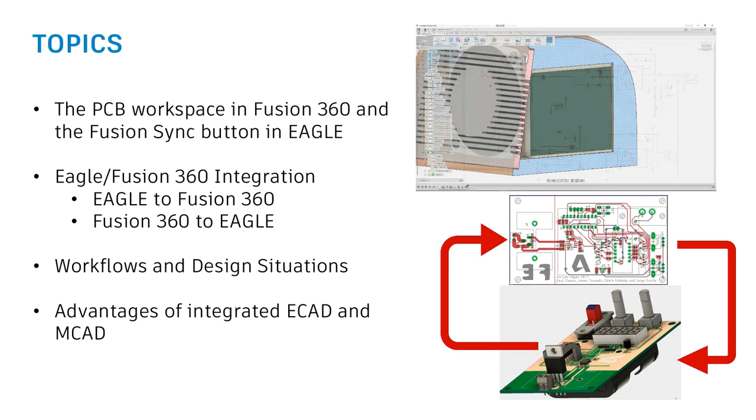So the integrated tools in Fusion and Eagle seek to resolve this by allowing a PCB component in Fusion to be linked to an Eagle board file. What this allows teams to do is work in a single Fusion design and a single Eagle board file, which eliminates a lot of the file management problems we used to see.

Yeah, usually there were a lot of errors when it came to conversion, so this eliminates that. So we're going to kind of walk through a bunch of different things with this in this presentation. We're going to start off slow.

The PCB workspace in Fusion and the Fusion sync button are the tools that we use with this integration. We're then going to jump in and show the two main workflows. We can either go Eagle to Fusion or Fusion to Eagle. We're going to discuss when we should use those workflows based on our design intent and the situation we're in. And we're going to wrap up with some of the advantages of this integration and some of the things we like about it.

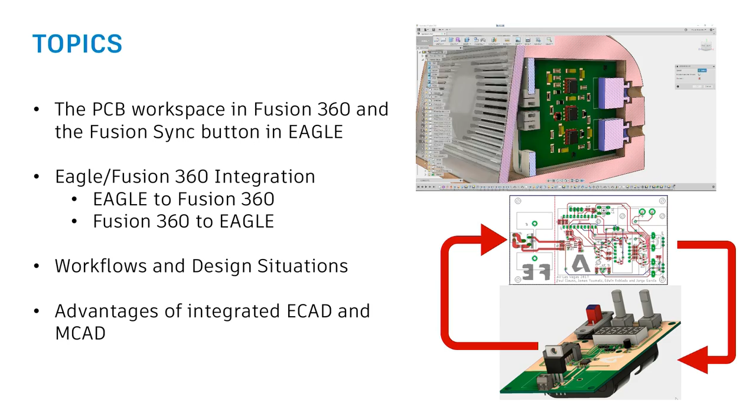So the PCB workspace in Fusion is how we can create PCBs in a Fusion design. Right now, the PCB workspace is relatively simple. We have only 4 tools.

We can access these tools in this workspace by using the Create PCB option. It's important to note that you're only going to see that option when you're working with the design history, or in parametric mode in Fusion. You won't see it in direct modeling. Using these tools, our mechanical designers can create a Fusion board shape and a board component with the PCB profile tool. We can copy the profile of a board brought in from Eagle with the Copy Eagle Profile tool.

We can edit the layout of 3D components, the packages from our Eagle libraries that are applied to the board, with the Move PCB components. And we can use the PCB status tool to see if any changes have been made to the board in Fusion since the last push to Eagle.

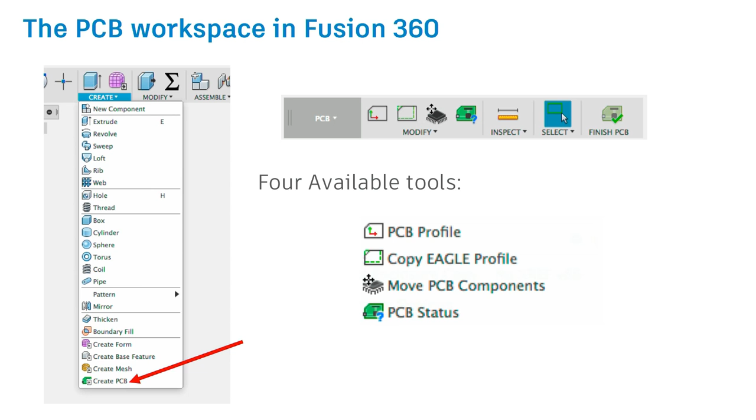We'll be demoing these tools throughout the presentation. The first thing you might notice is we don't actually see anything to communicate with Eagle. That's because all communications are done through the Fusion Sync button on the Eagle side. On the Fusion side, you define the body, and then from Eagle you can see that body and pull it in. So all the magic is kind of being triggered by Eagle, which is pushing to Fusion or pulling from Fusion. We'll make this clear in a minute.

If you don't mind, I'll go. Oh, go for it, I hate standing on one spot, it's too boring.

We've added a button into Eagle. If you have Eagle version 8 or larger, there's a new button that says Fusion Sync. That's where all the magic will begin. We can use the Fusion Sync button to link Eagle to a board, to a Fusion design, either a new file or an existing PCB.

When I click on the Fusion button, since you're using the same account in Eagle that you have in Fusion, it will let you browse all the projects that you have in Fusion. That way you could push that circuit board over to Fusion 360. This keeps both teams in sync, so it could be my own account, or if you're already collaborating with another team, you could push to their account, to that collaborative project. We'll be demoing this in a few minutes.

Now let's talk a little bit about the pull and push terminology. The Fusion Sync button helps us know when the board needs to be pushed or pulled. It gives us a status of where we stand in our design, collaborating with Fusion, and this is done using a color code.

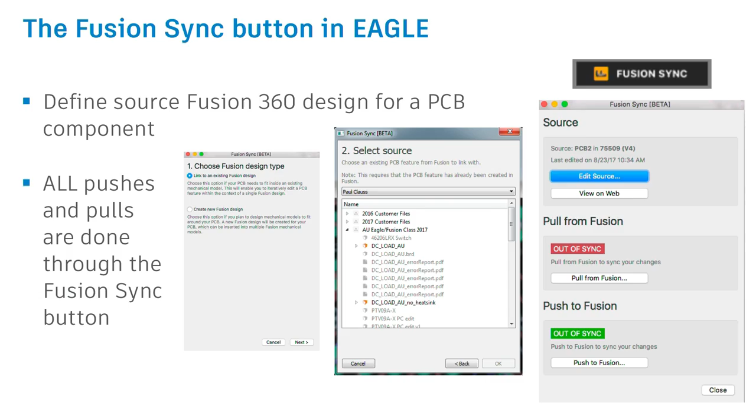Because we can either push from Eagle to Fusion or pull from Fusion to Eagle, we've got two ways to get a PCB into a Fusion design. The first is taking an Eagle board and pushing it into a brand new Fusion file. This will create a file that contains only the PCB board component and the applied 3D packages that we've mapped out in Eagle.

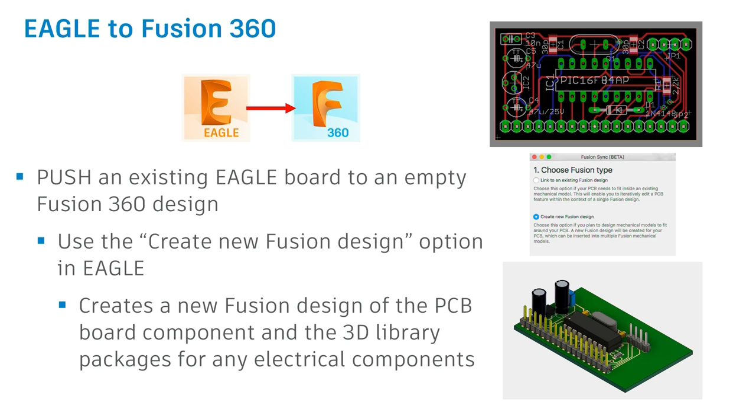We've got an example of this, so let's go right to it. This is Eagle right now that we're working on. Some of you are familiar with this workspace. Basically, I'm clicking on the Fusion Sync.

In this example, we're pushing a brand new design into Fusion. It lets me browse your account, since you're using the same account between Fusion and Eagle. It lets you browse the different projects you have, and once you find the project you wish, remember this is a brand new project.

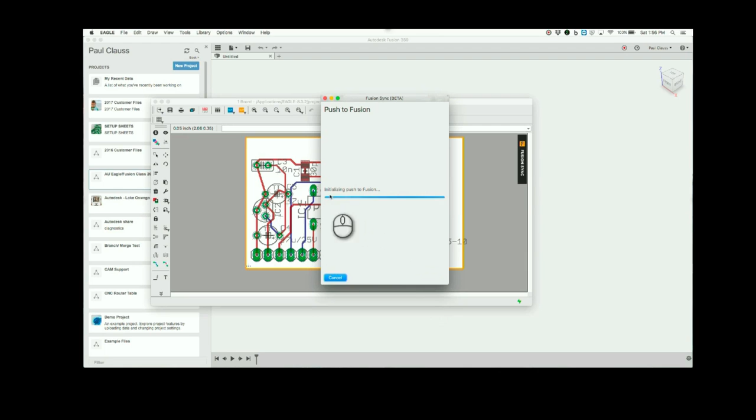It lets you know that your 3D models have been mapped out, that's what the green check mark is. I can make comments to my brand new push, and then I could go ahead and do the push. Now that will take a few minutes, so that's why we're using videos, because it may take a minute or two. This is all cloud-based, and it's using managed libraries.

Once we push it, you'll get that toggle right there letting you know that it has been successfully pushed. Now the mechanical engineer, or yourself, will actually see the render in 3D.

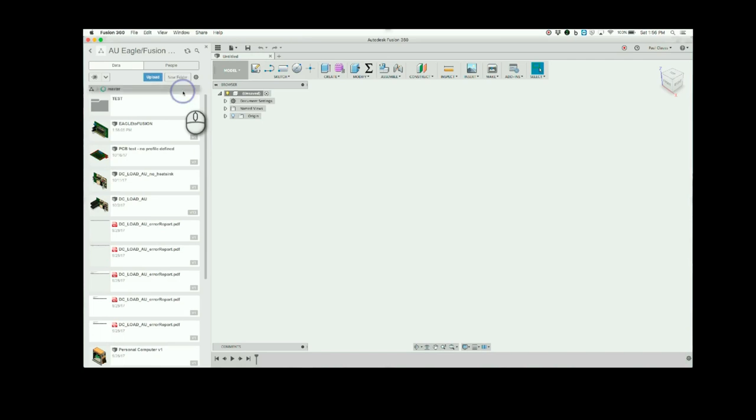So then I can go into my hub, find the location that we pushed that board to. I can see version 1, the comments that Edwin just left are shown in version 1 there, initial push to Fusion. And then I can open up the design.

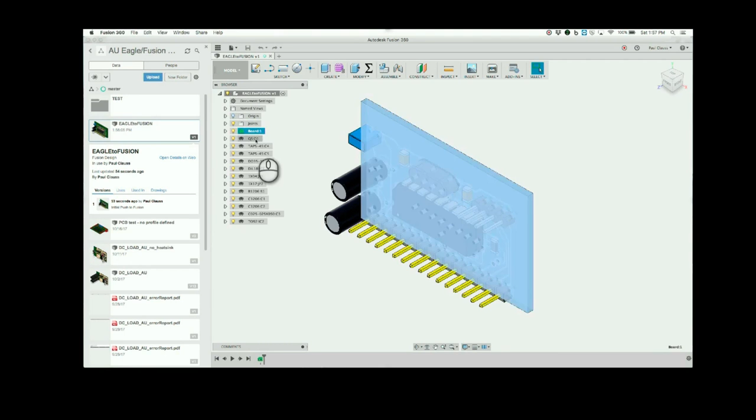We'll open up the design and we can see we have our board component and then all our circuit components are at the top level of the browser. This is something to be aware of because there are some organizational things like that. Sometimes we're going to want to create a subcomponent to manage our browser a little better.

But for now, let's have a look at the PCB status tool. And what this will show is that we only have an Eagle board shape. We haven't used the PCB profile tool in Fusion to create a Fusion board shape.

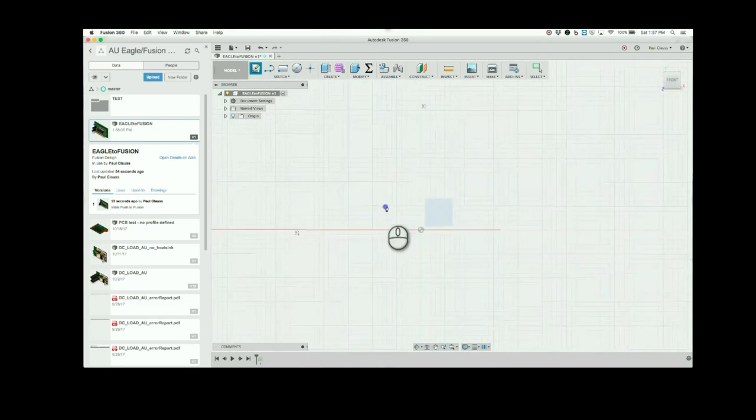Let's say, as an example, I just want to make this board slightly larger. What I'll actually do is roll back my design timeline so I can create a sketch before the PCB, create an empty sketch on the plane that the board lies on, which will default to the XY plane.

Then I'll label this sketch, I'll just call it board profiles for organization. And then what I'll actually do is go back into the PCB workspace and use the copy Eagle profile tool to copy in a sketch for reference. The reason I'm doing this is because we need to have a sketch before the PCB profile to create the Fusion board profile from.

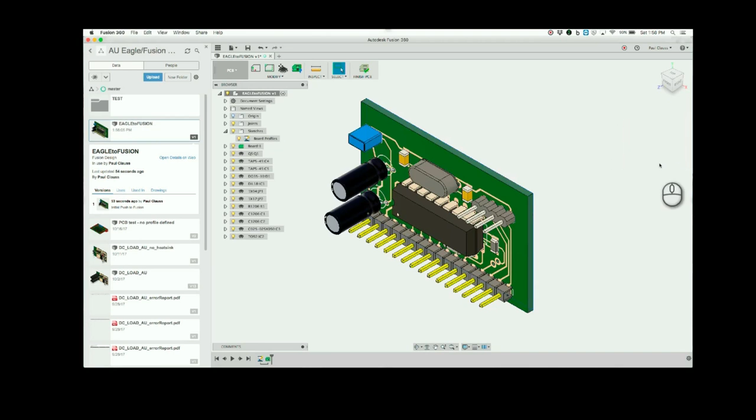That's how the design timeline works, we need to have that feature in the order beforehand. So I'll copy Eagle profile, open my sketch. Simple example here, we'll just drag out a larger rectangle using that first one for reference.

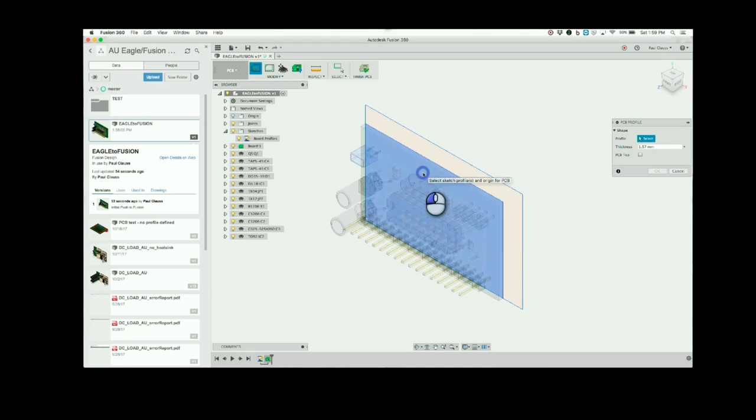Now we could actually go back into the PCB workspace and define our Fusion board shape with the PCB profile tool. So I'll just grab those two sketched loops, it'll merge them together. I'll keep my origin in the same place as the Eagle board.

This is important because Fusion actually uses two board shapes, but only one set of components that refer to the origin, so you can get them jumping around. Now we'll see in the PCB status that my Fusion board shape has changed since the last push. My Eagle board shape is always going to refer to the Eagle board used during the last push to Fusion.

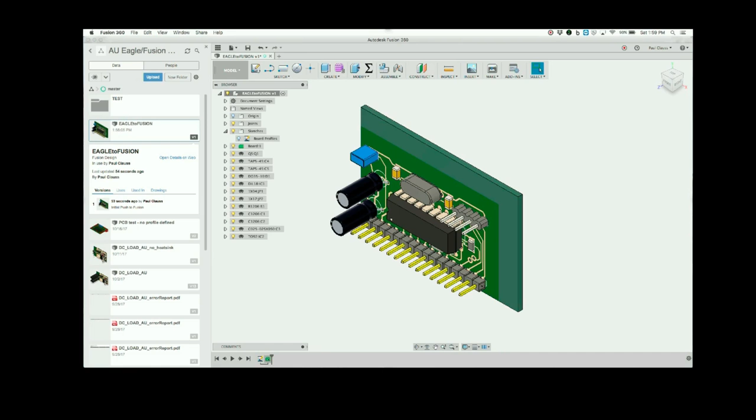We'll notice that I end this with the Fusion board shape activated, and that's because we'll want to pull those changes into Eagle during our next pull. If we had the Eagle board shape selected, there would be no changes to pull into Eagle.

So this was basically an example of a simple way of pushing from Eagle. Now we'll just go into other scenarios as well.

Our next scenario is we might want to start in Fusion, and a lot of times we want to do this to use the drafting tools in Fusion to start our board. So we can create the PCB, create the sketch, PCB profile, and that'll create the Fusion board shape, like we showed in the second half of that last video. The workflow we'll often use is: create our PCB profile, pull it into Eagle, apply our circuit components, and then push it back to check.

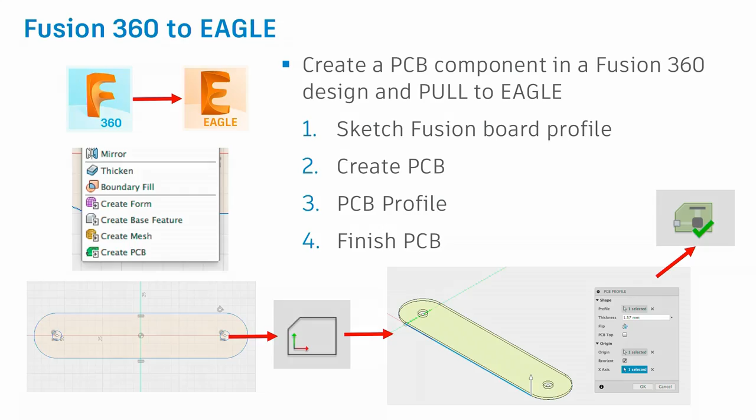So we've got an example of this here. This is a graphics card for a desktop computer, and we have all our other components in there. I've already got the sketch for where we want to create this board.

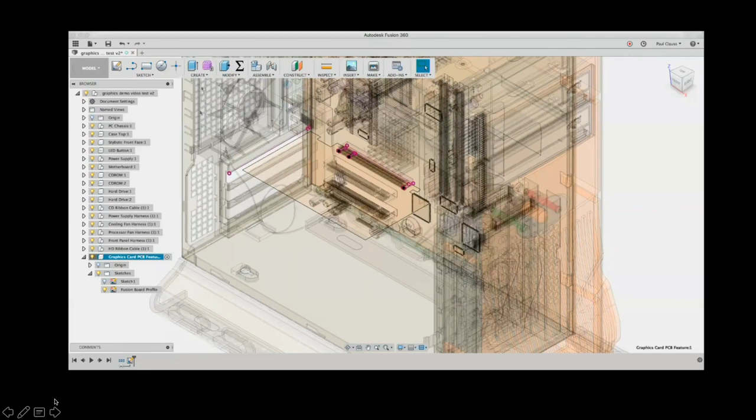First thing I'll do here is activate a subcomponent in my design. I created my sketches for the board profile in there. This will allow us to manage the PCB board and all the components, and they'll all be included in that component, so our browser's not going everywhere.

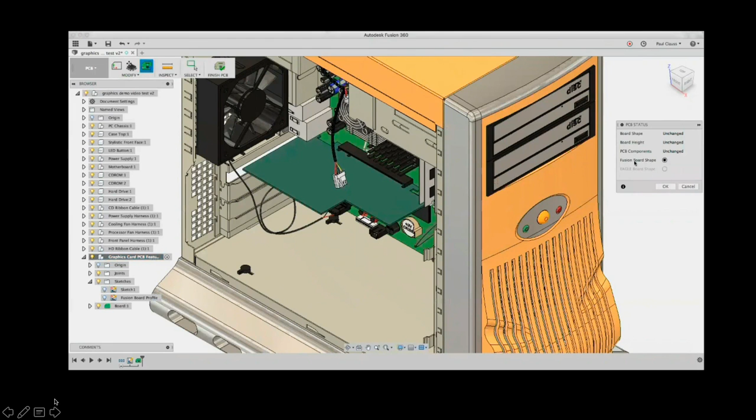I'll use the PCB profile tool. This will create my Fusion board shape. The origin I select here will be the origin used in Eagle. Now I've got my board. We can see I've got a Fusion board shape, no Eagle board shape yet. I can save this design, and then Edwin can actually pull it into Eagle.

When you're defining your PCB, it actually gives you the option how thick it is. But we've used values in this, that way it uses the most common type of prototyping house. So that doesn't need to be modified, but it can be if necessary.

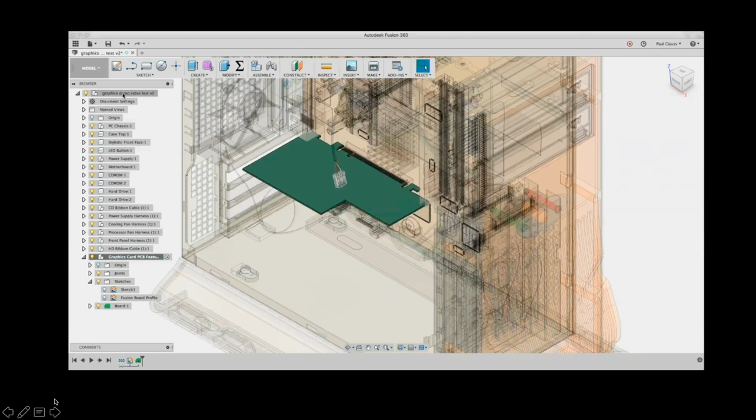One thing I didn't go into much detail on is we can redefine our axes for the board. I'll leave some comments that Edwin will see in the Fusion sync, ready for pull to Eagle, and then we can go into Eagle.

Now we're going to go ahead and do Eagle. Could you pause that real quick? Yeah, now I'm going to go into Eagle.

There it is. So now what we're going to do is launch Eagle, and Eagle doesn't know about that outline yet. So we're going to fire up Eagle, hit the Fusion sync button. That will let me navigate through the different folders and directories that I have, so I could find that PCB body that Paul created in Fusion 360, and I'll go ahead and pull that in. This is how the process goes.

So I'm going to go ahead and navigate, find that body that he defined. We'll see a lot of designs are grayed out there. Those are designs that don't include a PCB component. We need to have created a PCB component to link that design to Eagle.

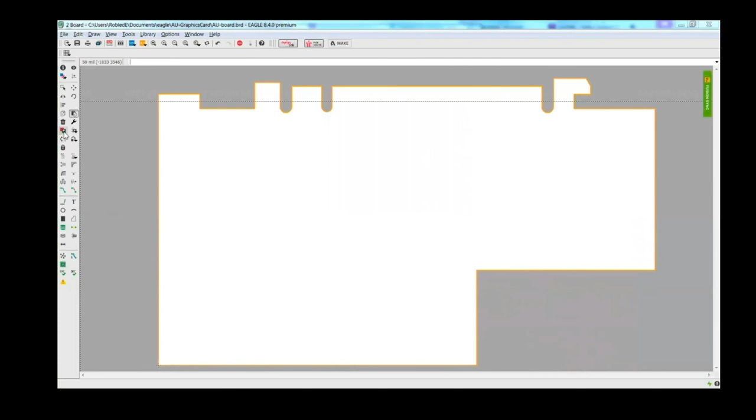Now I'm going to go ahead and use a design block, which is a brand new feature of Eagle, and add the electronics to this board outline that we have here. Basically, it's a graphics card. It looks upside down, that's how I imported it. And I go ahead and add my electronic components to this.

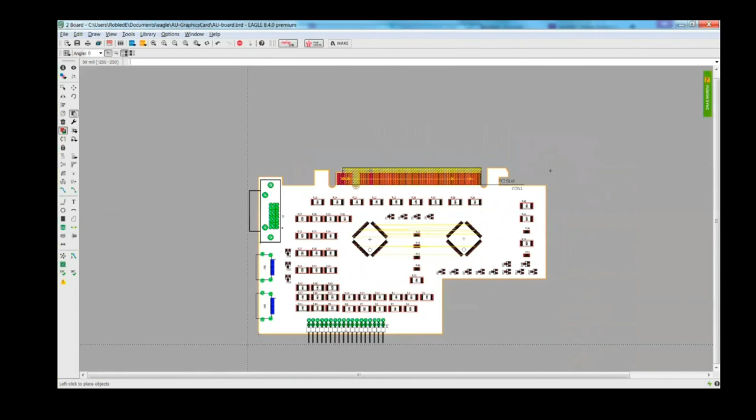Now, Eagle gives you all of the checks necessary for an electronic circuit board. Once I place my components and I'm satisfied with the circuit board, in a few minutes I'm going to push it back to Fusion, and he'll get the notification on Fusion that it has been pushed back to him as well.

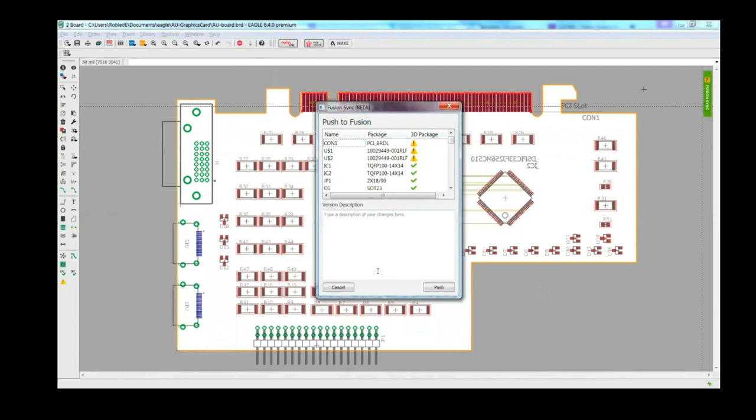And we'll see the Fusion sync button turns green there, letting Edwin know that he's made changes that aren't shown in the Fusion board. Correct. So as we go, we could make notations here. It lets me know what packages actually have 3D models, has the board outline. Now I could go ahead and continue with my push over to Fusion.

Please observe here that we're actually able to notate every time we push and pull, letting the engineer, either myself or whoever I'm collaborating with, know what changes, what modifications we did. And the beauty of Fusion 360 is it has version control, which is really nice. So every time you're pushing, it's actually creating a new version of it.

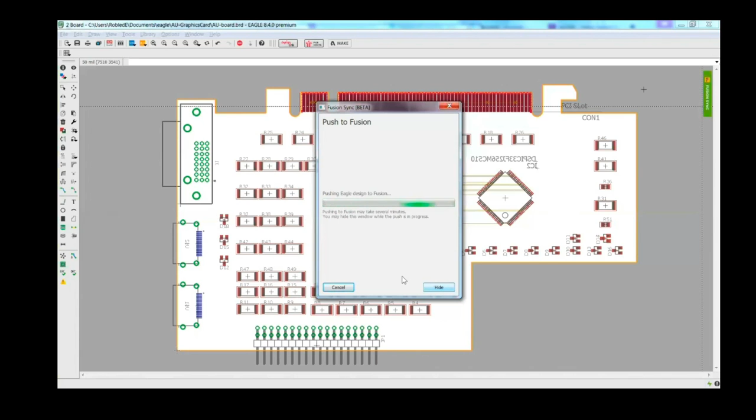You can think of pushes as just saving a new version of the file, either from Fusion or Eagle. So now I see that Edwin's created that new version of the design. I can open it up, and when I do, we'll see that the 3D components from your Eagle library are now shown on the board.

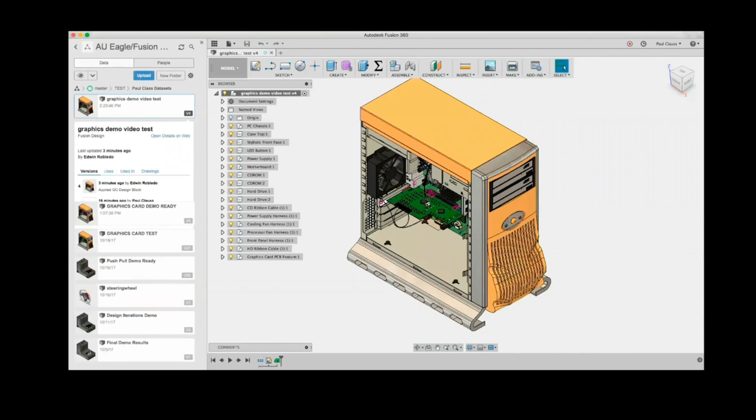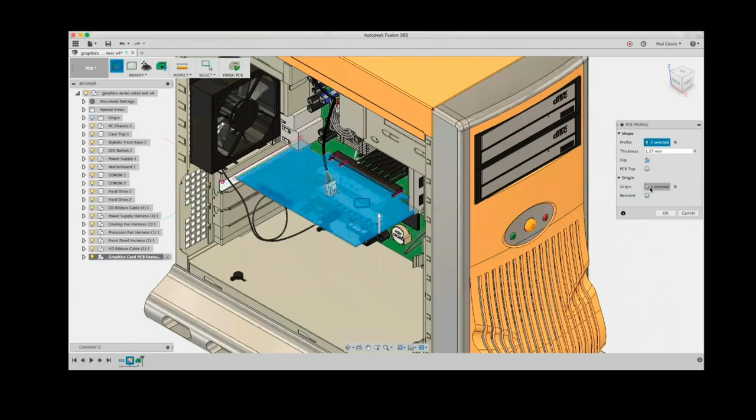Maybe already I've decided to waffle on this design a little bit and make some changes. I'll fill in that corner that we're missing from the board, and maybe I actually want to pull those pins over there because whatever we're interfacing with will be over there. So I'll add that loop into the PCB profile, keep the origin at the same place, say OK.

Now let's have a look at the PCB status tool. We'll see that my Fusion board shape has changed, and my Eagle board shape is still the same as the last push from Eagle. So we'll keep our Fusion board shape active because we want to work with it.

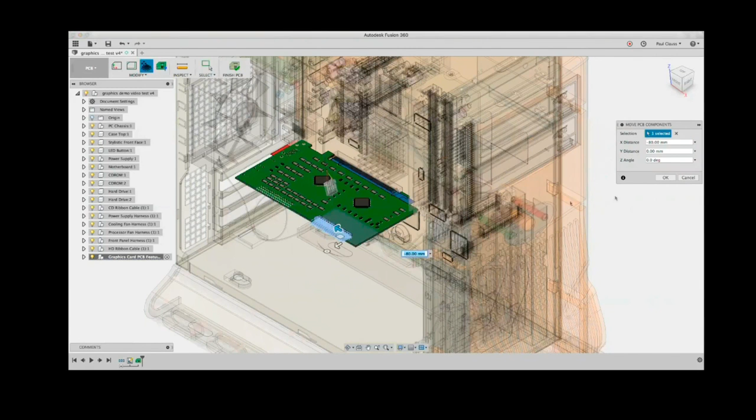And then I'll drag these pins. I'll use move PCB components and kind of just eye it out, put them down here, and say OK.

I'm just going to pause it really quick, Paul. Yeah, so we're on the Fusion side, right? We're there.

So we're on the Fusion side. We're able to modify the board outline, and we're also able to move the parts. But those changes don't reflect the circuitry on the circuit board. So when that gets modified, it has to be pulled back into Eagle. That way we can make the modifications to accommodate what the mechanical engineer has done. Is that understood?

Yeah, so I'm a mechanical engineer. I don't want anything to do with electrical. But maybe I want to take a capacitor, it might be too tall, it might be hitting something, there might be a violation. So this gives you the capability to move it, and I don't have to talk to my engineer. That's absolutely correct. You could move it, and he'll get the notification that there's a movement.

I'll pull that in. I'll see the traces kind of all crisscross, but now I could rip it up. That way I could do my trace and accommodate the component according to its new placement, and generate those paths.

Will Eagle automatically generate new paths if I move it? No, in Eagle you have to rip up those traces and turn them back into signals, then invoke manual routing or the auto router. That way those traces can now be defined.

We can see that Fusion isn't updating the traces and the board routing, we can see the footprint of that component still hanging out where it was. So something to note here is when we go to the Eagle board shape, we see that the PCB components have changed there, and they're kind of just floating out in space where we have the Fusion board.

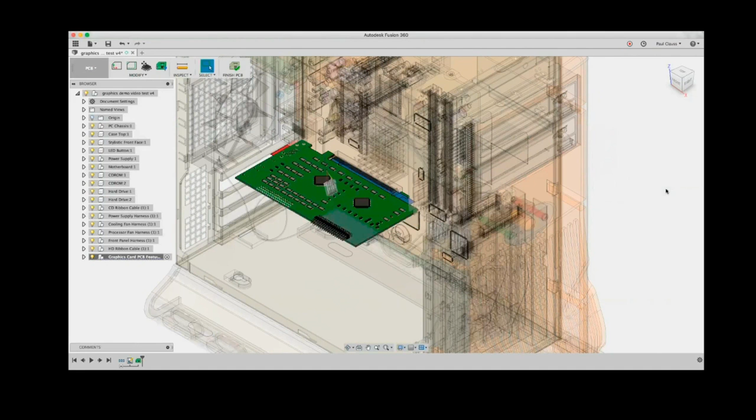That's right, because we've already done it, what we'll want to do is activate the Fusion board profile and then just pull that. Now when I pull it, I'll see that cutoff taken away in Eagle, because he saves it and stores it. Now he can make the notations about moving the connector that I wanted, as well as making the modifications to the board, and then I'll see it in Fusion in red, and in Eagle I'll see the sync button in red, and I'll make those modifications there at that point.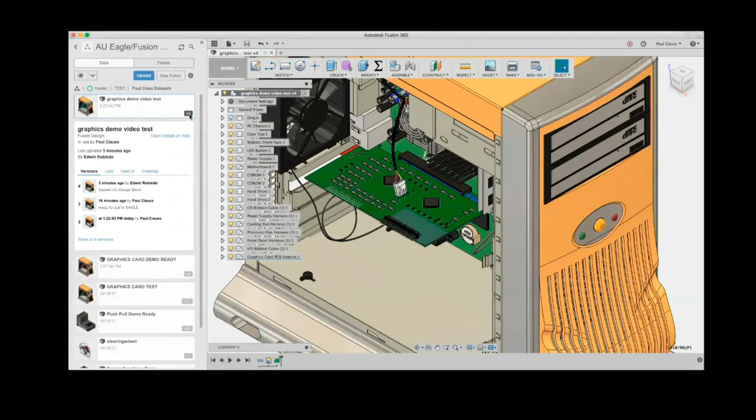Any questions about this? In Fusion, they can have a library with tools, right? In Eagle, you have a library of components as well?

So Eagle, by default, has approximately 300 libraries of components. They're categorized by manufacturers, or by functionality. So you have your MOSFETs, transistors, caps, discrete components, linear components. But we also have libraries by different companies like Infineon and Samtec. So yeah, we have quite a bit.

Eagle does have a system by which, in the background, we're constantly adding to the library. It's called Managed Library, so those libraries are constantly being updated as well. Yes, we do.

Can you communicate restriction areas to the ECAD for controlling the height? In Eagle, we don't see that yet, not really, not the height. So that would be something they'd need to collaborate on when pushing and pulling and making commentary. While they do the push and pull, they'd have to let us know what the commentary is, so we can actually use the right component according to the height.

Now we use 3D models, usually based from the manufacturer, so we do our best to get as accurate a height as possible. That way you could get enclosure violations if necessary. Absolutely.

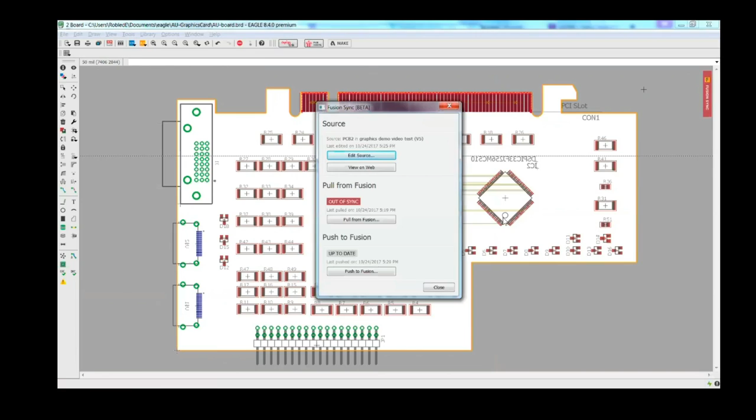The Eagle integration is available in both versions of Fusion, the basic version and Ultimate. And with Eagle, we have a free version. You can start working with it today. This works already, even on the free version. Yes, it does.

Any other questions? Okay, cool. So now we're going to go do some workflows. Now that we've seen pushing and pulling both ways, how should we apply this based on our different design scenarios? We usually find ourselves in three main situations.

We might have a standard board that goes into many different designs that we've modeled out in Eagle, like this Arduino board. We may have situations in which the shape of the PCB and form is dictated by the mechanical enclosure, like this electric gearbox here. And we have situations where we have to assume that both the board and the enclosure design will still be changed, and we need to work flexibly.

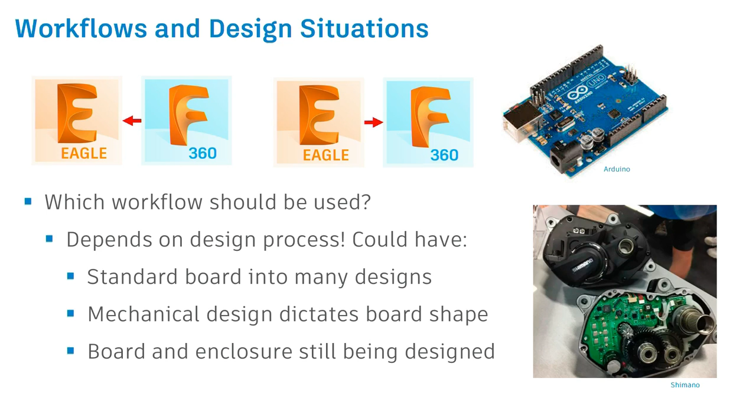So the first one we'll go over is a standard board into many designs. The big thing we want to think about in this situation is, if we do update the board, we want to minimize the number of pushes and pulls between Eagle and Fusion to update all our linked assembly designs.

Another assumption we can make is, usually if we're working with a very standardized board, the mechanical designer is probably not that likely to be changing it. The preferred workflow would be to work around the existing board that's already been manufactured or anything like that.

So what we want to do in this situation is take our Eagle board, create a new Fusion design, and then we'll have our board-only design. And then we actually want to insert that Fusion design as an XREF component into our assemblies. This allows us to keep the Eagle to Fusion link in a single design.

So if we make a change to the standard board, it'll create a new version of the DC load AU board. And then in all the assemblies that board's been inserted into, it'll trigger the get all latest command, as anyone familiar with working with XREFs knows. So instead of actually breaking the link repeatedly from Eagle, pushing and pulling back and forth, we can do one push-pull, and then the mechanical team can easily update all the mechanical assemblies.

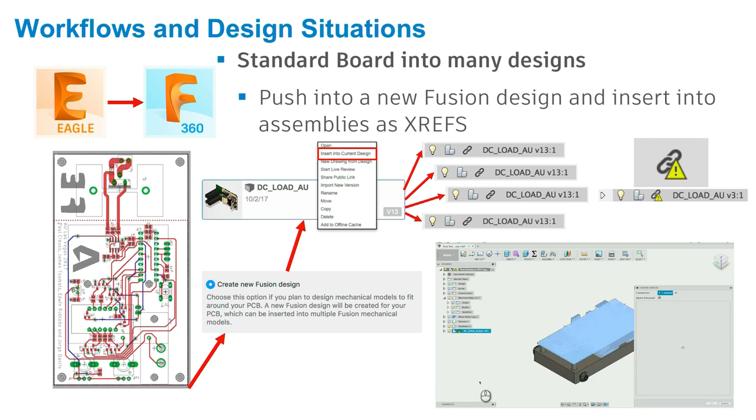Here, basically what you're doing is we have a version of the circuit board with the heat sink, and then a version of it without the heat sink. If you join my class tomorrow, we'll talk more about that heat sink and the thermal properties it causes on the circuit board. But that's the nice thing about the X references: you could have different teams working with the different versions, one without the heat sink, one with the heat sink.

Edwin has a whole class tomorrow with my colleague James Umatz where they go through the thermal simulation. So if you're interested, have a look.

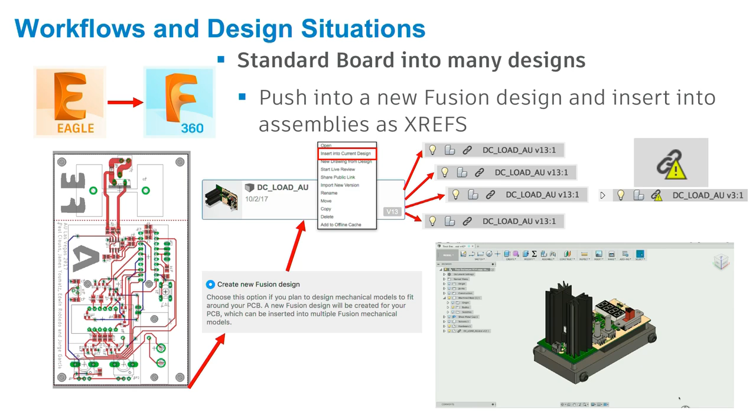The next situation is when the mechanical design is complex and dictates the allowable form of the PCB. This is a complex sketch that needs to fit into an oddly shaped area. We'll create the board in Fusion, pull it to Eagle, apply our PCB components, then check 3D packages after pushing back to Fusion, just like in the graphics card demo. This gives us the ability to reference existing model geometry while creating a board, making the sketch much easier - I can project a couple lines and do offsets to define that sketch.

Some of our Eagle users will understand that creating this type of board outline in Eagle is no easy feat. Eagle is not really a drafting program - it's basically a circuit board designing program, so our drafting tools are extremely limited. To do that outline, it would take the engineer maybe half a day. He could also use DXF, but that's prone to error for scaling and unit systems.

With this new system, he's able to project that complex outline, and I'm able to pull it into Eagle and populate it. As soon as I populate it, he gets the information and can see if the board will actually work for him, and if the heights will work too. If we need to move anything around on the board after seeing the PCB components, we can easily do that and pull back to Eagle.

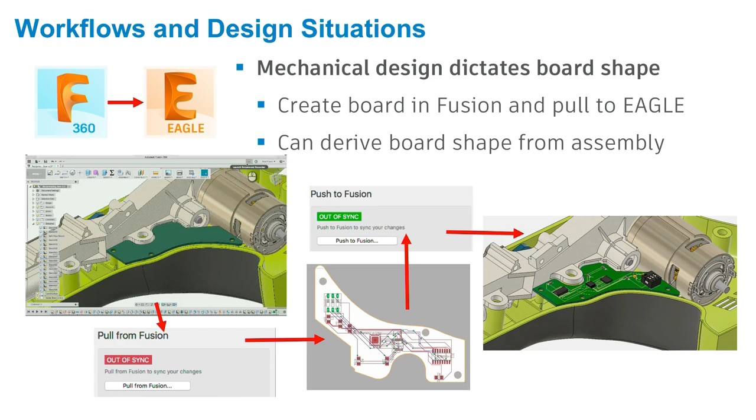The last situation is when both the board and enclosure are still being designed, and we may have large changes made to the board. In this situation, we want to approach the whole design in a way that allows both the board and assembly to be easily updated from either side. This is actually easiest if we start with the Fusion board shape and use it throughout the design process to drive the PCB.

The reason we want to do this is because we have two board profiles present - Eagle and Fusion board. Starting with the Fusion board shape and continuing to use it presents the least risk of making changes to the board that may cause lost references or bad geometry that doesn't work out in the assembly design. This is because the sketch defining the Fusion board shape is native to the Fusion design - we can parameterize it, refer to it more easily, and trust that the references aren't lost because we use that one sketch throughout the whole design process.

The other advantage here is changes to the Fusion board shape will be shown immediately in the Fusion assembly. We can easily visualize different configurations and changes to the board.

We could set up an Eagle board parametrically using joints and other techniques rather than the sketch to update correctly. But every time we wanted to visualize the new design, we'd need to push from Eagle to Fusion.

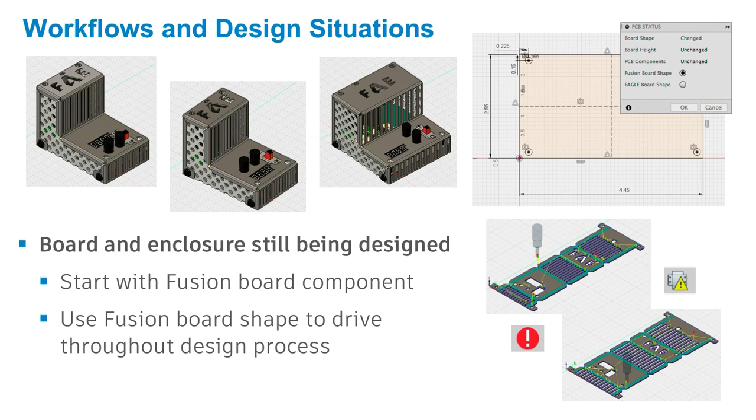Going into the manufacturing side of things, we can see this sheet metal down here. If we use the Fusion board shape, we can easily update all our manufacturing to prototype immediately. Same thing there, so we actually have a quick example of that.

So this is a DC load circuit that measures DC loading. Basically what it does is you put a load on it and use the knobs to see if the load you're using will give you the current that you want. That's basically what this is.

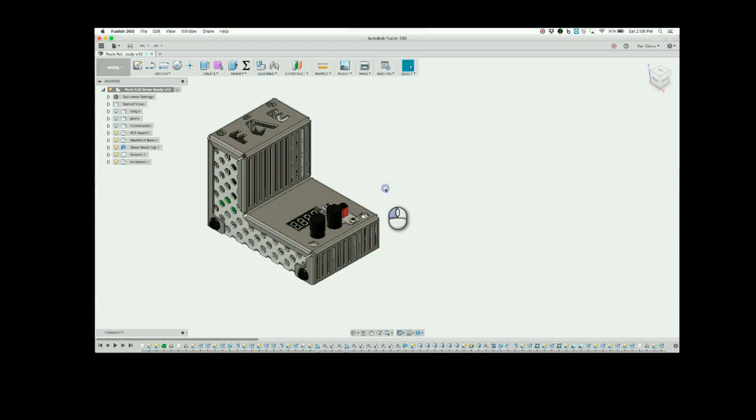We'll show how some quick changes are updated, all on the Fusion side. This design's almost done, but as the manufacturing engineer, there's a couple changes I want to make. First, we'll show that all the CAM is completed here.

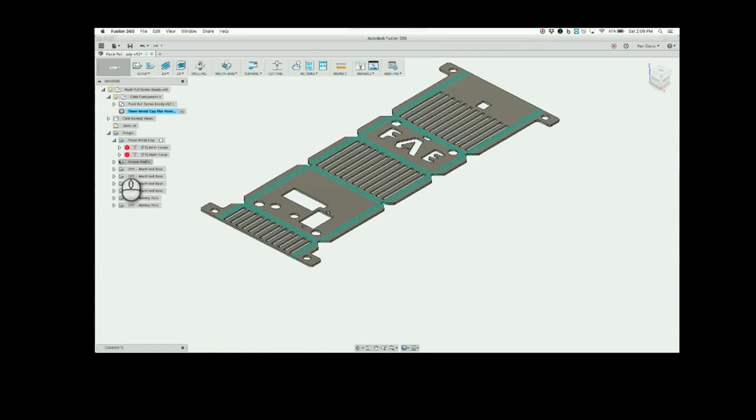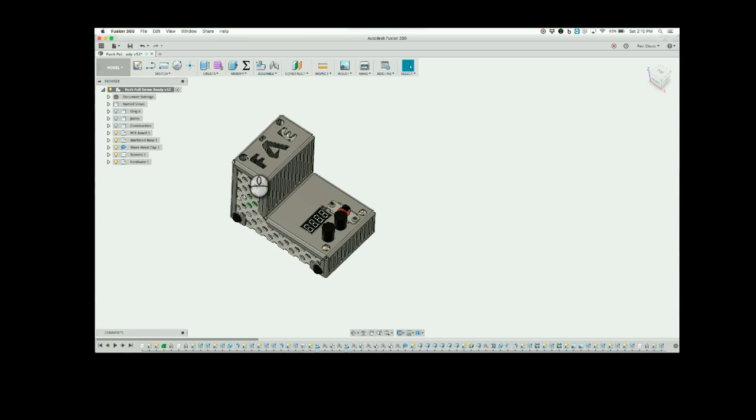I'll show it with the sheet metal. So we have our water jet, and we're all ready to actually make this part. But let's say some of these holes I want to move around a little bit, and since we've been doing it for so long, I want to just move the knobs one last time.

These holes, I don't like how they're on the sheet metal bend, and that's all driven. Those holes are for mounting the board, so they actually started their life in this design in the Fusion board shape sketch here. So I can move them over, and we'll see that the model updates as we'd expect.

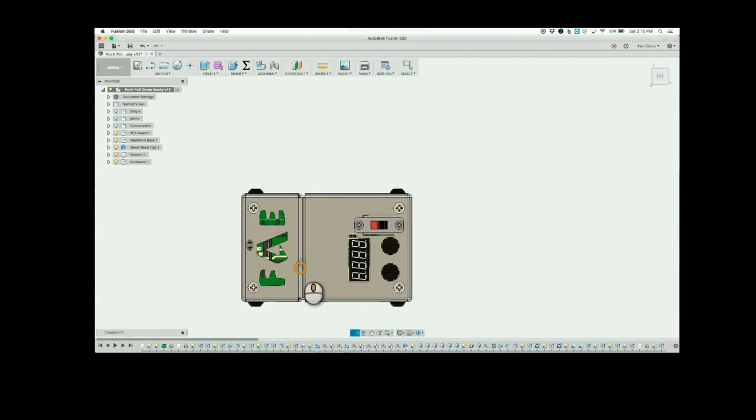We have a little more space there. Things are looking a little better. And we can see the board updates - those holes have moved, and all my mounting hardware and other components update.

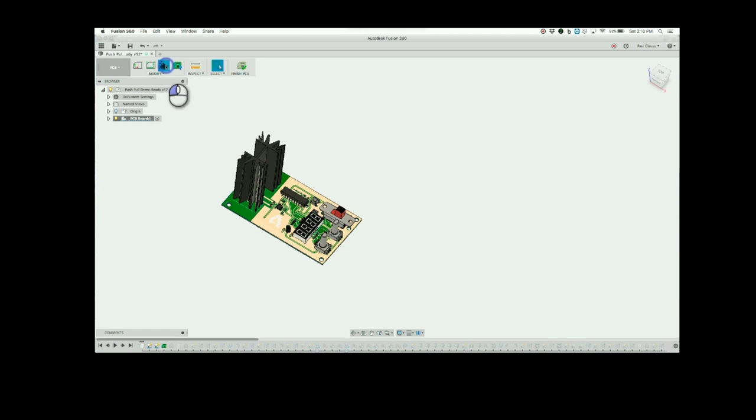That change is complete. So then let's say I want to just move these switches and potentiometer knobs around a little bit. Again, I can use move PCB components to get things just where I want them. I'm not moving any of these components drastically here. What we're trying to illustrate is how the integrated tools make this a simple change.

We don't have to create a new version of the board, export it out, bring it into Fusion, and check it all over again. We can just do it and see that everything works.

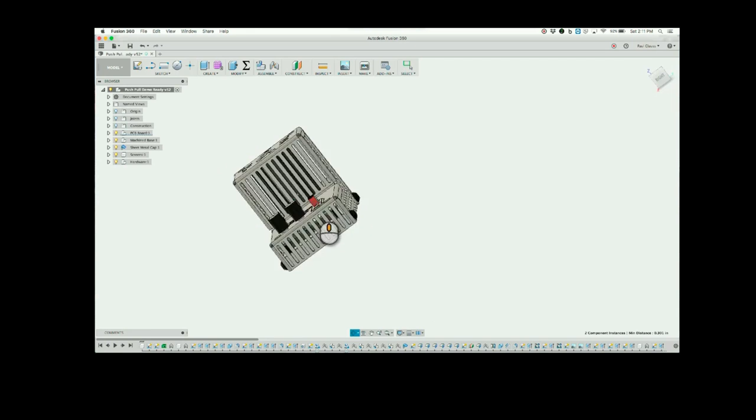Now if I go to my sheet metal component, we can see that my flat pattern's out of date. So I'll go to CAM - everything still looks like it's where it should be, but we know that flat pattern's out of date, so our manufacturing engineer already has a red flag there. So we'll update the flat pattern.

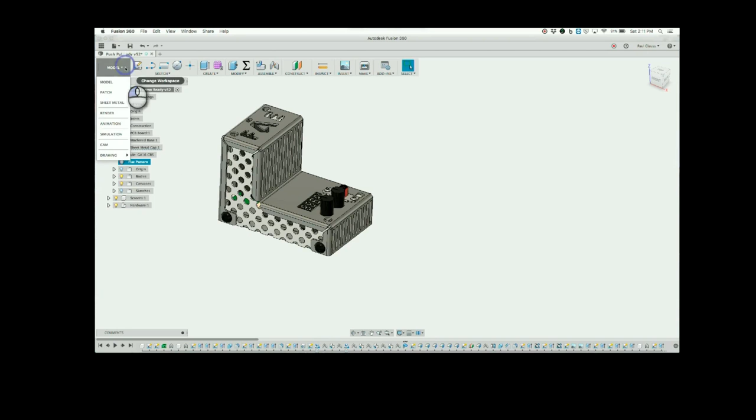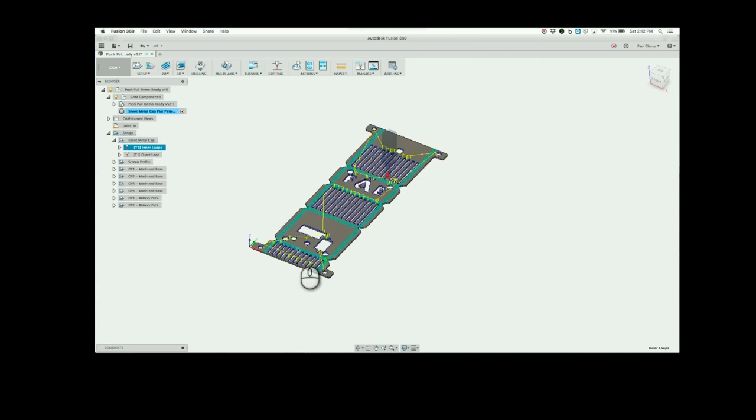Let's go back to our CAM workspace. Now we can see this appears a little off. All I need to do to get our tool paths set up again—instead of exporting the sheet metal to a new program and opening a new CAM setup—is regenerate the tool paths, and we're good to go. We can continue our design process on this part and actually start prototyping it.

If Edwin needed these changes to the board, all he would need to do is open up the board file in Eagle and see that the Fusion Sync button has turned red. Whatever components he moved, we'd make the modifications appropriately in Eagle as well, updating the traces and components, because moving parts means you have to go edit them back in Eagle. So we could go back into Eagle, rip it up, retrace, run the auto router, whatever tool you want to use, and then push it back to Fusion so everything syncs up.

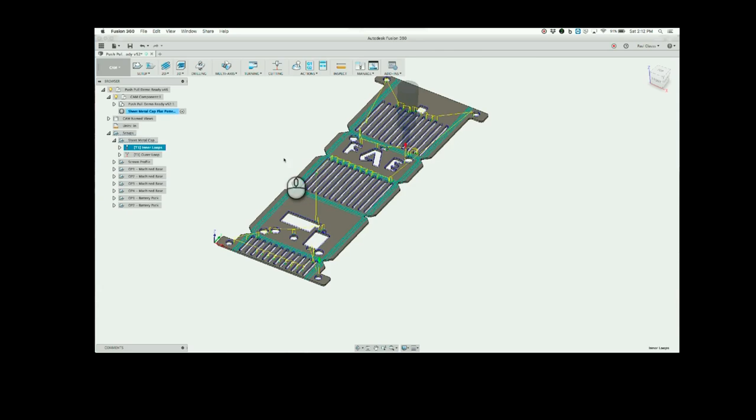So when we approach designs using these different workflows and use them properly, they present a few advantages over our previous methods. The biggest advantage is that the mechanical and electrical teams can work through design iterations in a single Fusion design and a single Eagle board. This is great because it eliminates the issues with file conversions and the potential for errors there.

It's also much easier to track changes to the board. We already talked about the Fusion Sync button and the PCB status tool. We have comments on all our versioning, and we can see in the CAM workspace out-of-date tool paths and the need to update flat patterns for sheet metal.

And we can even go into A360 where folks on both teams—yeah, this is the best part—you could actually push this to A360 and they can make comments. Anybody collaborating on this team could do markups as well, letting us know if there's any other modification needed. So the entire team is exposed to this, and we can keep track of that.

That actually shows an example with the Z height there—from looking at the board and our sheet metal cap, I realized that this circuit component sits a little higher than we need it to. How can we work around that? Yeah, exactly—you get a violation from the height, so he either has to fix the enclosure to accommodate this. What I want to mention is it's always about using fewer mouse clicks.

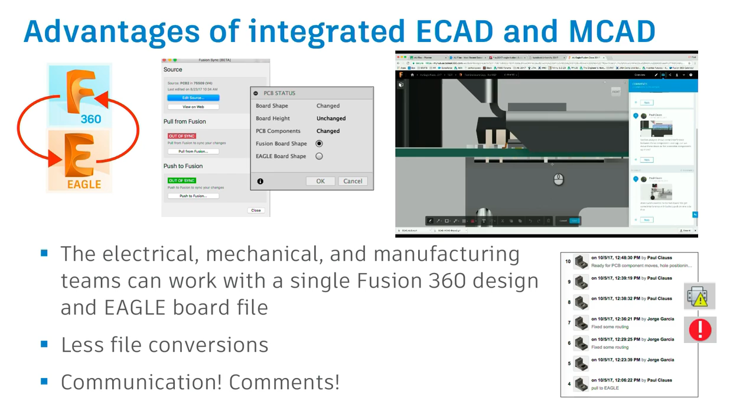No, not really, not yet. When it comes to libraries, we now have a system called Managed Libraries. We're giving the manufacturers of those components an account, and now I can see those accounts from within Eagle. Before, you'd have to download libraries, navigate to the manufacturer, and hope they had it in Eagle format.

If not, you'd just have to recreate it. So with Managed Libraries, we've given accounts to the different manufacturers, and within Eagle you go to add and actually see what they've contributed and bring in those parts. You don't have to navigate for libraries anymore, though you still might—this is all brand new, and we're trying to add and update as much as possible. Also, not all of our libraries yet have their 3D models mapped out, but we have a team working only on that, and they're clearly labeled in Eagle which ones have 3D models mapped. So when you push to Fusion, you'll get that realistic measurement and the realistic component as well.

To add to that, you can't directly link a Fusion design to an Eagle library right now—that's coming in the future. Right now, you can model whatever you want in Fusion and put it in an Eagle library. You just need to export it as a STEP file and import it to the library online at ECAD.io. With your managed library, you can assign which 3D model a component is going to have, and Eagle links that model with the cloud, so when you push to Fusion, that's how the whole magic works.

Is support for rigid flexes and multi-index boards on the roadmap? Yes, on Eagle, absolutely. Right now we don't have it for rigid and flex boards, but we do have certain technology like teardropping that will help for that, and we're working on it. Since Autodesk acquired the company, what we've added in the last 8 months is, I'd dare say, more than what was added to Eagle in maybe the last 20 years.